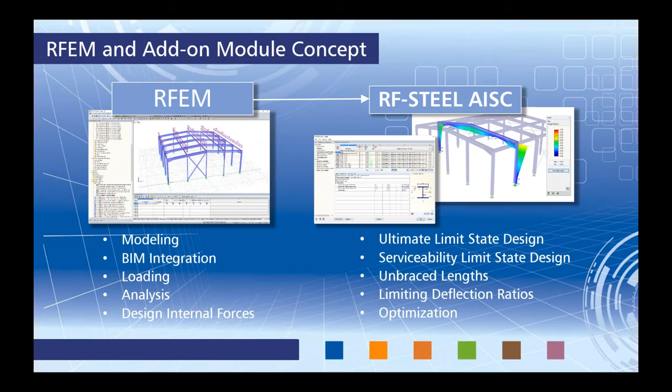In the 2010 edition of the AISC, in Chapter C, like I mentioned, we'll be focusing today on the direct analysis method. This is in comparison to the effective length method in Appendix 7. Back in the 2005 edition, these were actually flip-flopped. The effective length method was in Chapter C and direct analysis method was in Appendix 7. To me, this kind of tells you that maybe this is the direction that a lot of engineers are headed, more so towards a direct analysis method rather than effective length. We do have the option to do both in the program, so I will show you today focusing on the direct analysis method.

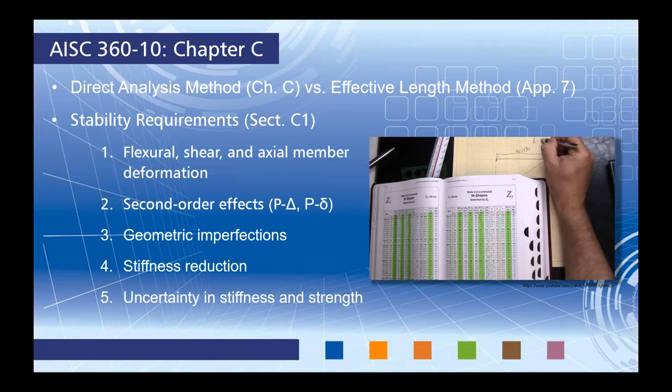Section C1 gives us 5 stability requirements. Those 5 requirements include number 1 here, flexural, shear, and axial member deformations. Well, this is in RFEM alone with the analysis. We also need to include second order effects, P-delta and P-little-delta, which we'll discuss in our next slide. We want to take into account geometric imperfections. We want to take a look at stiffness reduction and how that's handled in the program, as well as uncertainty in stiffness and strength. So with that, we can jump into our RFEM model.

So those of you who are not familiar with the program, this is RFEM. This is the main program where, for the purpose of saving a little bit of time here, I went ahead and modeled a 3D steel hall.

We have our tables that we can work with down here at the bottom. We have our project navigator, which you'll see me in quite a bit today, as well as our tools up at the top. As far as our structure goes, as you can see, it's just basically our steel members from the AISC. We have some columns here that are typical W shapes.

These are moment frames looking in the global X direction. I have some smaller columns here that are HSS members. I have these purlins filling in between our moment beams, HSS members as well. And lastly, I have some lateral bracing here that are single angle members.

I also used our load combination generator to basically produce the ASCE 7 load combinations, which we'll take a look at in just a minute, but you can see them all populated here. As far as the applied loads, I did use our load generator, area loads on members, to create a dead load at our roof height here.

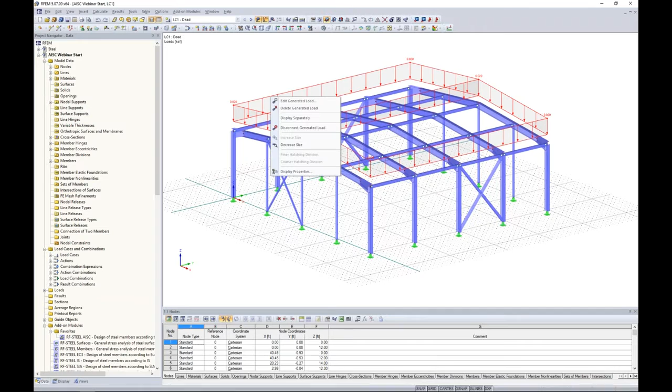Now you can see that I can always right-click and display separately, and I did so that it is a one-way load distribution on our purlin members only. Same thing goes for the live load, just maybe a little bit smaller of a magnitude here. Now I can always just click the display separately again to view them more so as an area load.

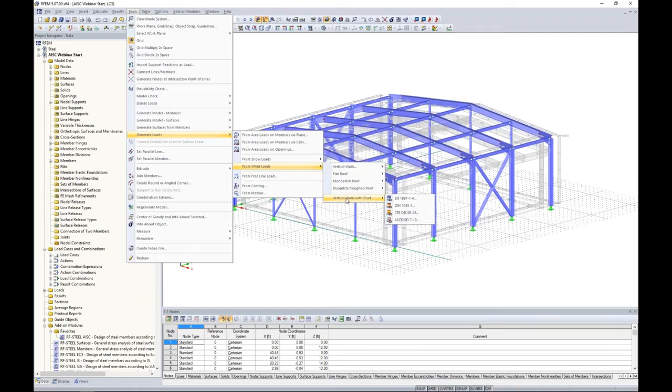And lastly, I used our load generator for our wind loads. This is available under Tools, Generate Loads. We have both snow loads and wind loads here, and we can take into account both the walls and the roof according to ASCE 7. Now, this is for pretty general type structures, as you can see from this picture here.

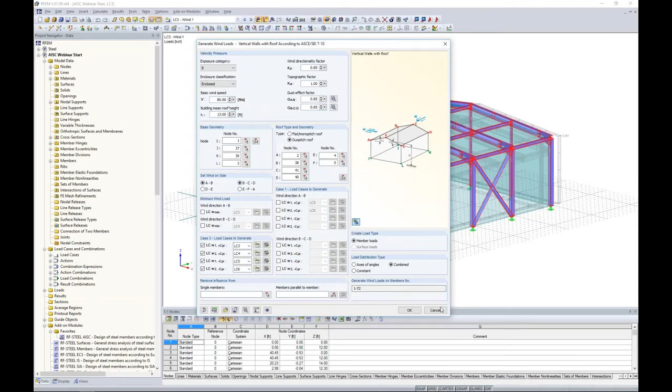The minute that you're kind of getting outside of these rectangular shapes for building type purposes is when you'll need to manually apply those loads in RFEM. For this particular case, I only did apply case 3 from ASCE 7. We can also apply case 1 and minimum wind loads as well. Just to keep things a little bit more simple, I've only applied case 3 though, so just keep that in mind. With case 3, we then have 4 wind load cases that are generated automatically, which you can see here.

So with that, I can jump into my load cases and combinations. And just like you saw graphically, here is our dead load, our live load, and our 4 wind load cases. I can take a look at my combination expressions, and because I use automatic wind load generation from ASCE 7, I have my LRFD load equations and my ASD load equations that were created automatically. If I press this little info button here, I can see exactly what ASD load combinations the program is going to address, as well as the LRFD.

So under the load combinations tab, this is where our individual load combinations are listed out. You can see here that the orange are categorized according to our LRFD equations, and then we have the red for our ASD equations.

What is nice though is that under my load cases, I've only defined dead load, live load, and wind load. You can see under action categories, we have rain, we have snow, we have earthquake, but the program filters out all those unnecessary load cases so that we're only looking at the relevant loads. So that's nice, we're not having to filter through all those other load cases in order to apply those to our structures. Our result combinations here are nothing more than an envelope solution for our LRFD and our ASD load combinations.

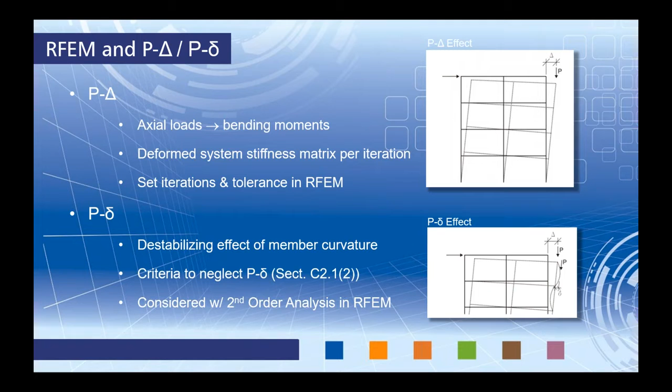Now this really is the engineer's discretion, but the nice thing about RFEM is that with that second order analysis, we will always include P little delta. Some other programs require you to add additional nodes along the member to take that into account, but with our program, you don't need to do all of that. It's automatically considered when we're running that second order analysis. So jumping back to the program, you can see here second order analysis, and it's very clear that we're running both P delta and P little delta.

If I go into Calculate and Calculation Parameters, this is where we can control our iteration and our tolerance settings for P delta and basically any nonlinear analysis within the program. The default set for max number of iterations is 100. That's a fairly good number. Now, when we are talking about precision and tolerance, we give you a range if you check this box from 0.01 to 100. This isn't necessarily a percentage.

There's so much that goes into this nonlinear analysis that we give you this range from 0.01 to 100 with the lower end of this factor being more exact. When we're getting up towards the 100 range, this is going to be much less exact. So the program will iterate until we're reaching somewhere along this range that we have set. And you can see that the default is set at 1.0.

The problem being the lower factor we go here to get a more exact answer, the longer the solve time. And if you set this too high, then you might not have accurate results. So again, default is set at 1.0. Typically, you're not going to touch this. So that's why we have this grayed out as it is.

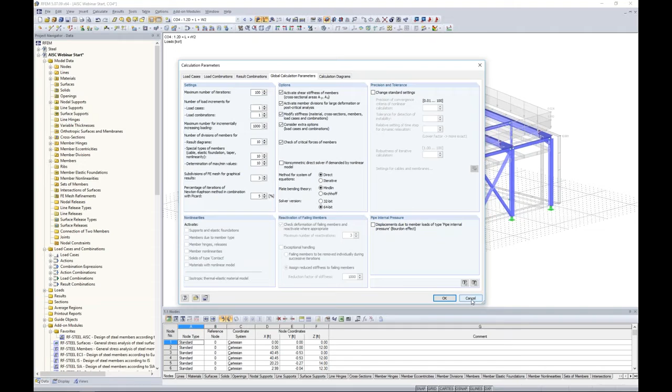Like I said, you can go ahead and adjust these factors, but most likely, unless you really know what you're doing, you probably will not be in this precision and tolerance section here. So that essentially covers P delta and the second order analysis within the program. Jumping back to the PowerPoint, the third item from Chapter C is geometric imperfections. And I want to discuss a little bit about how RFEM can handle this.

The consideration of initial imperfections comes from section C2.2. The code tells us that this is more so to address column out of plumbness. When we're looking at member out of straightness, this is more so addressed in Chapter E for our compression members. So addressing column out of plumbness, we have a couple options for this. We can either directly model the imperfection. This comes from section C2.2a.

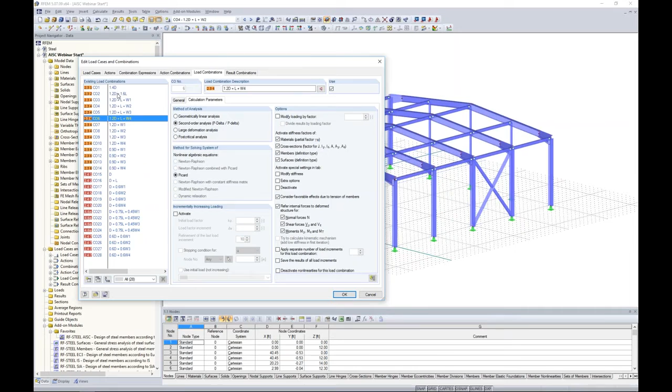Now I can tell you that 1.7 is a pretty high ratio. I think that for most structures, I won't say all because this is certainly something that you would want to check for yourself, you will not come very close to that 1.7 ratio. For example, this structure, I ran it and I think I was at 1.4 or 1.13 or something like that. So therefore, that tells me that I don't need to apply my notional loads to any of these load combinations that have wind load in them. But you'll notice that my first two load combinations for dead load and live load, well, these are gravity-only loads. So therefore, technically, I do need to apply these imperfections to those particular load combinations.

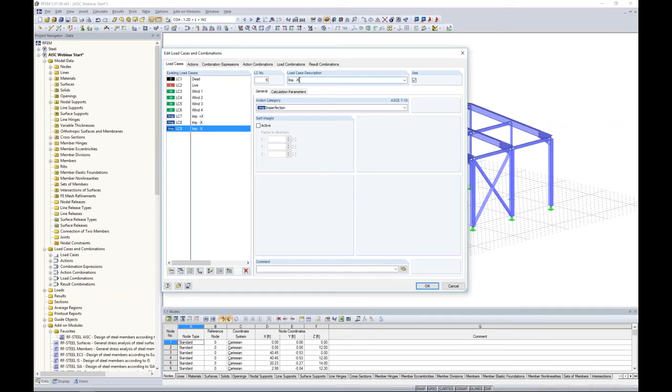So how do we do that? Well, back under load cases, I'm going to create a new load case. And under the action category, we have this option imperfection down at the bottom. I can give this load case a description, so we will call this imperfection positive X. I'm going to create a copy of this and rename it to negative X. Create another copy as positive Y. And one more copy as negative Y. Now, as I just showed you in the PowerPoint, the code does require two orthogonal directions as well as positive and negative. So that's what we're addressing here with our 4 different imperfection cases.

So now that we have applied these different imperfections to the load cases, we need to somehow implement them into our load combinations. If I look at my load combinations, I still don't see any type of imperfection here. So how can I apply these to my load combinations? Well, under combination expressions for LRFD, there's an option for imperfection load cases here. If I check this checkbox, then automatically this settings dialog box pops up.

And here are my 4 imperfections that I just created. Now I'm going to uncheck a couple of these options. Now what I do want to have checked is I want all imperfection load cases as alternative, meaning I don't want them to act at the same time. I want to treat each one individually, not as additive.

This other option, subject to specific load cases, well, this is where I'm going to tell the program to automatically insert these into the load combinations, but never to include them with my lateral loads. So how do I do that? Well, there's a button here with 3 dots, and that brings up select load cases. Now I can select my lateral loads here for wind load. So notice the only ones I'm leaving unchecked are my gravity loads, dead load and live load. I click OK. So now this imperfection positive X will be excluded with any load combinations that contain those wind loads.

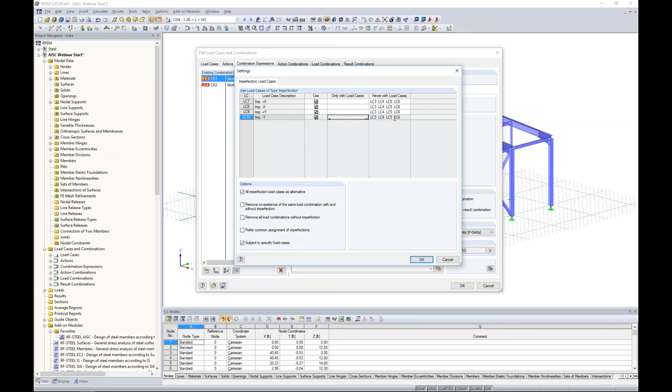So now that I've given it some criteria on how to apply it to my load combinations, I also want to check this checkbox here, differently for each combination expression. And the reason for this is I don't want to apply these imperfections to my ASD load combinations. My ASD load combinations I'm going to use for deflection only, so I really only want to use the imperfections for my design purposes for LRFD. So now you'll notice that because I've checked this differently, my imperfection load cases ASD is unchecked.

So now let's take a look at our load combinations. You'll notice we have the 1.4 dead, but now we have 4 additional load combinations, including imperfection 1, 2, 3, and 4, all treated separately. The same goes for 1.2 dead plus 1.6 live. And then we have the 4 additional imperfections. But the minute that we take into account that lateral wind load, I have no imperfections applied to these load combinations. This is exactly what I wanted. I wanted the program to filter out those imperfections and only apply to my gravity-only load combinations.

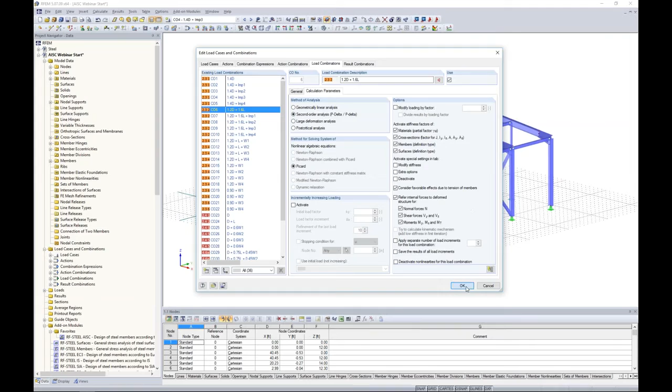If I scroll down here to my ASD load combinations, I don't have any imperfections applied to them at all. Again, this is exactly what I wanted. So you can imagine when you have a ton of load combinations, this is a very useful feature. The program has a lot of automatic features so you don't necessarily need to go in here and add them in manually. Now for each of these load combinations, we are still running them according to a second order P-delta analysis.

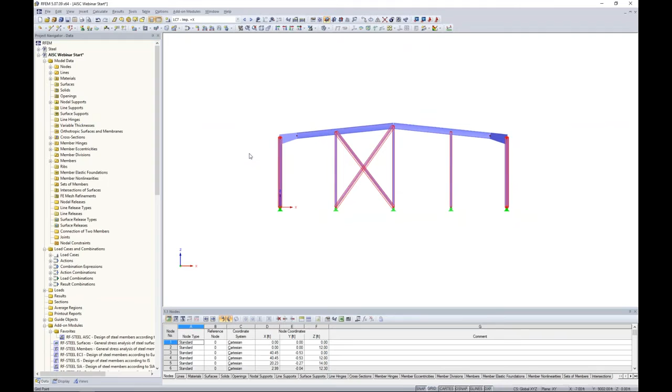So now that we have applied them to our load combinations, I want to select it from my drop-down box here, imperfection in the X direction. So I've applied them to my load combinations, but I haven't exactly applied them to my structure. So now we want to do so. As the code mentions, I only want to apply them to my columns; out of plumbness is really what we're looking at. So I'm going to highlight all of my column members, and if I hold down my control key, then I can unselect my braces here, just like what we would do in AutoCAD.

I can create a new user-defined view here, visibility by selected objects, and under my Views tab in my Project Navigator, at the click of a button here, I can create a new user-defined view. So this one, we can title it Columns. So now if I were to ever get out of this view by canceling my visibility mode, doing other things, and I want to go back to my columns, well, now that's available right here. And you can create as many user-defined views as you would like.

So for our imperfection in the positive X direction, I want to make sure that this is what's available in this drop-down box here. Under Insert, Loads, Imperfection, I'm going to choose Graphically. And you'll see that my list of members that I just highlighted are available in this list here. And this should look pretty familiar because in this drop-down, I've selected AISC 360-2010, current loading. Well, this is the equation for notional loads. We even give you the code reference according to C2.2b.

Here's my 0.002 factor. We do allow you to modify that if you choose to do so. We have our alpha factor according to LRFD or ASD. And then our Yi. Yi is going to be those gravity loads, our dead load and live load, applied in our structure.

So again, the notional loads really depend on the loads being applied to the structure. We also have the option down here for precamber. So if you did want to put in some type of precamber for the structure that's also dependent on your axial loads, then you could do so. For our case, we're going to leave this as 0 and only apply this so-called out of plumbness.

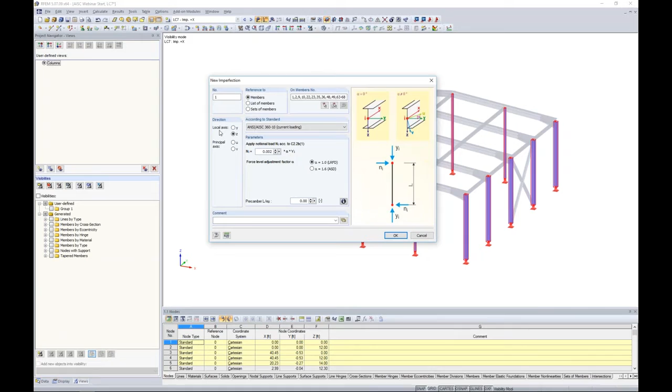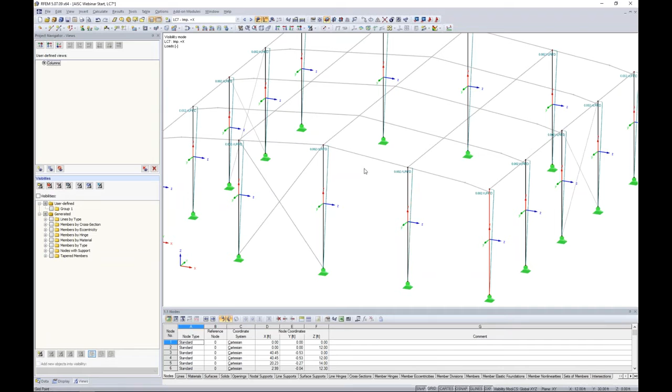Now, we will want to apply in the local axis direction, local Z. So I'm going to click OK, and something that may be helpful is if I right-click and turn on my local axes and my members. I'm going to also turn this into the wireframe view. Now we can scroll in here. Here's my imperfection. It's telling me 0.002 LRFD. This is that out of plumbness that we're going to take into account for those gravity-only load combinations.

I'm going to scroll over to negative X. I need to highlight my members again, and again go to Insert, Loads, Imperfections graphically. And instead of a positive 0.002, to account for the negative direction, all we need to do is put in a negative 0.002 factor here, and we have our imperfections in the negative global X direction.

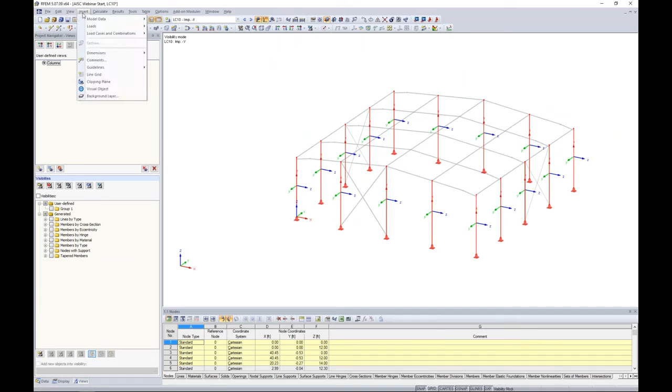I'm going to do so again with the positive Y direction, Insert, Loads, Imperfections graphically. This time I'm going to leave it as a negative factor here, 0.002, in the local Y direction. So when I click OK, you'll notice that I've now applied them according to the global Y positive direction. Here's our second orthogonal direction taken into account. And lastly, we have our negative Y, Insert, Loads, Imperfections graphically, positive 0.002 in the local Y-axis direction.

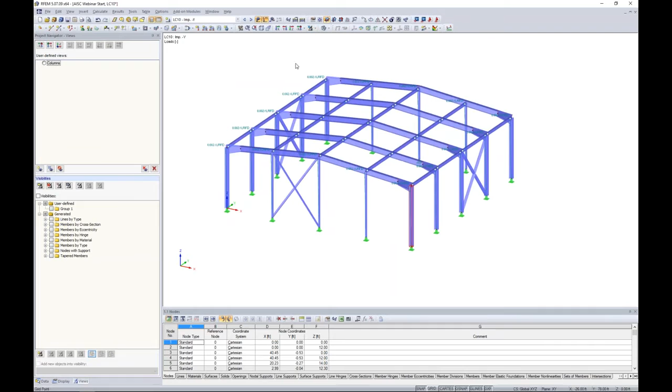So I can turn back off these members here. We can render our sections, turn off the local axis system, and I'm going to cancel this visibility mode, and let's just drop down to one of these load combinations where I've applied the imperfections. So now you can see my dead load, my live load with the appropriate load factors, as well as those imperfections that have been applied. Okay, so that is all that we need to do to account for those imperfections.

Let's go back to the PowerPoint again and discuss the modified stiffness and how we can address this in RFEM. Section C2.3.1. This tells us that we need to apply a 0.8 factor for all axial and flexural stiffnesses to members that contribute to the stability of the structure. Now there is a little note section in the code, and it tells us, well, in order to avoid artificial distortions, just go ahead and apply this 0.8 factor to everything. So this is a very easy way to avoid the artificial distortions. Apply that 0.8 factor to all axial and flexural stiffnesses of every single steel member within our structure.

Now there is an additional tau sub b factor for flexural stiffness. This comes from section C2.3.2. Again, this is just a screenshot directly from the code, and you'll notice that our tau sub b factor is dependent on our axial loads. So when our required axial compressive strength over the axial yield strength is less than 0.5, then tau sub b can just be equal to 1.0. But the minute that that ratio is greater than 0.5, well, we need to use this equation that's dependent on our axial loads to calculate what the tau sub b factor is, which will be less than 1.0. Again, we have our alpha factor 1.0 for LRFD and 1.6 for ASD.

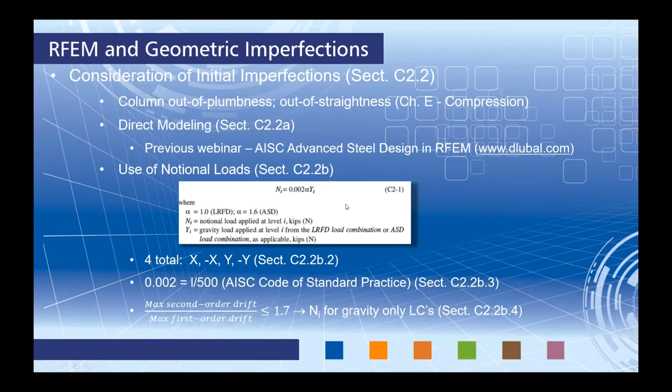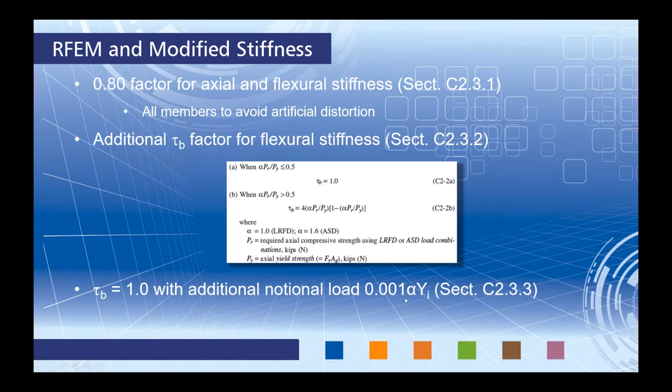And what we also can do, the code tells us, is that with a tau sub b equal to 1.0 for all of our flexural stiffnesses, we can completely forego this second equation here and apply an additional notional load of 0.001 alpha Yi. This is exactly like the notional loads that we saw in the slide before with our imperfections. Now, it is very clear that this notional load is not in lieu of our notional loads from our geometric imperfections, but it must also be applied to our different levels. So what's nice though is that in RFEM we can take this into account. So to me it's almost easier to have the program automate this tau sub b calculation than to go back in and add even more notional loads.

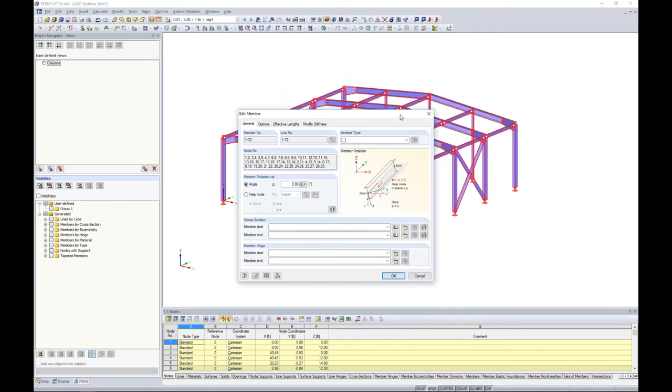So let's take a look back in the program to see how we can apply these stiffness reductions. What I want to do is I'm going to select my entire model. Everything is highlighted in red. And if I right-click on any one of the members, I'll see the member option here and edit. We have this modify stiffness tab, and this is the case for all members within the program. Now the default is set to none, but if I go ahead and open up this drop-down, I will see according to AISC 360, section C2.3.2.

So we even give you the code reference. Again, this should look very familiar. This is the criteria that we were just looking at directly from the code. Tau sub b factor, we can either set this to iterative. So in that case, it will determine the ratio of my required versus my limit axial compressive forces.

Or I can set this equal to 1.0 and then I can go back in and apply those additional notional loads. Again, I think it's almost easier just to let the program iterate and find that tau sub b factor for me. Now just know that this tau sub b factor will only be applied to our flexural stiffnesses, not axial stiffnesses.

We need to give the alpha factor a designation. In our case, we're designing per LRFD. Now here is our 0.8 multiplication factor for both our flexural and axial stiffnesses. It's 0.8. This is exactly what the code tells us to do. Notice you can't edit this, and the reason why is because this is what the code tells us to do. So if we're going to design according to the AISC 360, then we're going to only put in the application according to the code.

If you wanted to do so in some other way for whatever reason, we do have multiplication factors here where you can adjust your stiffnesses individually for the members based on whatever criteria you would like. For our case, we are going to use what the code tells us to do. So now I click OK, and that tau sub b factor and that 0.8 modification factor have automatically been applied to my structure. So after all of that, we are finally ready to run an analysis within RFEM.

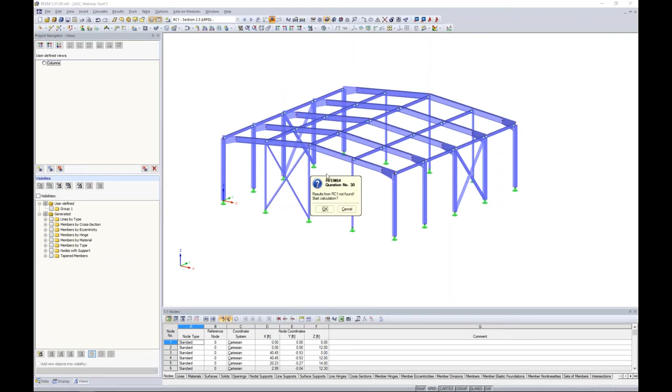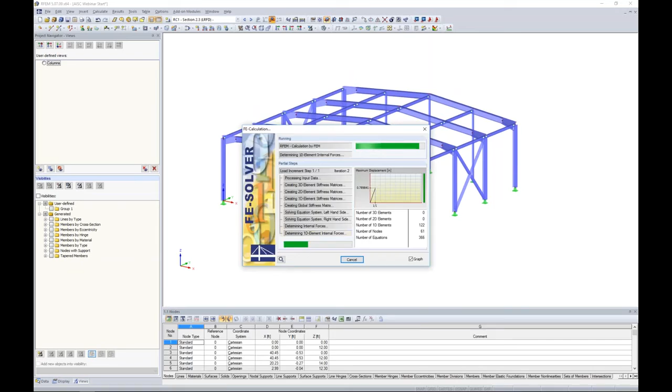If I select RC1 here, this is my envelope solution for LRFD, and I can begin my calculation. I wanted to make a very clear point that everything that we have done up until now has not even touched any of the add-on modules. So everything we've done for the analysis purposes, including stiffness reductions, imperfections, has all been done in RFEM, our main program. And now we're just running all of our LRFD load combinations to get the analysis results in the program.

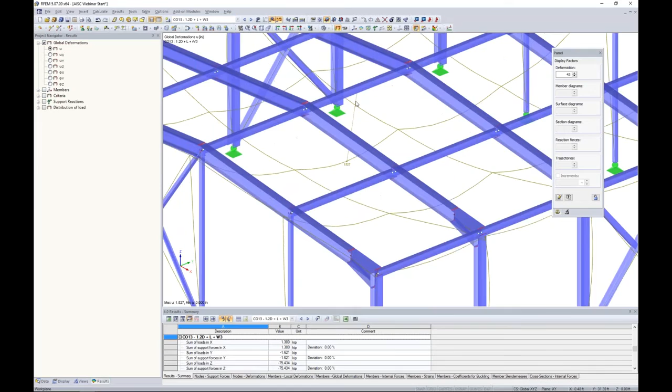Now, when I do run a result combination, you can see here that I have a couple different numbers shown here. That's because for a result combination, we give you both the max and the min values. You can change that here in our result combinations. Maybe better is to jump to a particular load combination 13, to view the deflections in particular. So after we ran our analysis, we have our results pop up here on the project navigator.

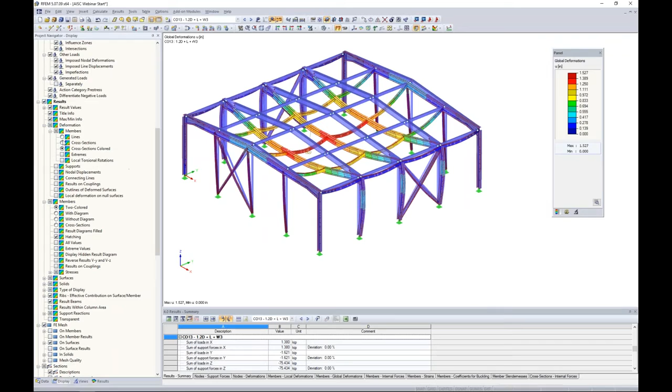Under the Display tab, I want to make it clear that this Display tab really controls everything that you're viewing within this graphics view. So if you're not happy with the basic line elements here for our deflection, first we go to Results and we can expand out this tree, go to Deformations, and under Members, we can change this according to how we'd like to view the deformed structure. We can choose cross-section colored here. We can move this back to lines, and this is the case for everything really that you're viewing here. RFEM gives you a lot of control over your results or your input or anything else that has to do with the graphic view.

So maybe back on our Results tab, we want to take a look at our members in particular. And so here we can select members, and I'm under Load Case 13 here. And I'm looking at, let's say, our internal forces for our axial loads. So you can see here that, again, this is just a basic view of our axial forces, but if I ever want to change this, I can go back to my display. Maybe I want to view it as a color diagram with some different contours.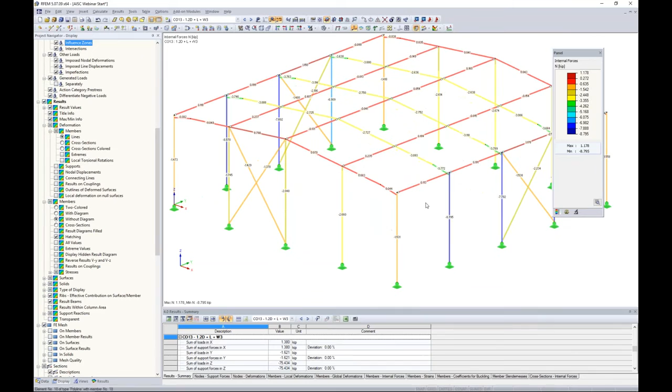I can view it without the diagram so that it's a basic wireframe structure, and I can view these different colors here based on the axial loads, or I can even view it as a rendered cross-section. You have complete control over what the scale is here. You can change colors if you would like. So if you can't read something very clearly, again, complete control to change any of that. You can always also right-click on a member and go to the results diagram, and here is going to be a little bit better of a display in more detail. We can take a look at our shear forces and maybe our bending moments along this particular member.

We can even drop down and choose a different load combination if we'd like. So this is a little bit more detailed view rather than viewing everything graphically. If we go back to our Results tab, maybe we're more so interested in our support reactions. Perhaps we'd like to just select one of these moment frames here. We can base it on the visibility of the selected objects.

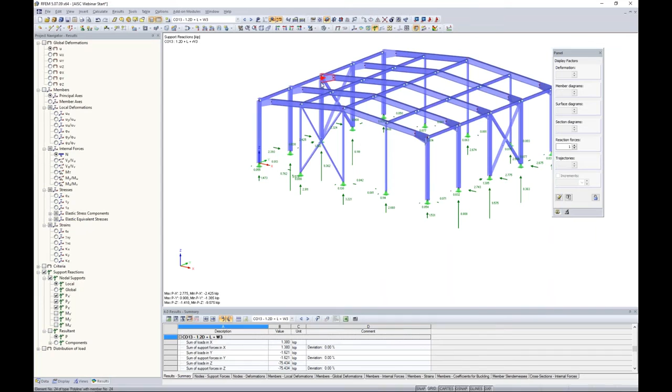I have the ability to print off this picture here. Again, I can increase font sizes, I can change colors, I can do anything that I'd like as far as viewing these results. So essentially, this sums up the basic first half of the webinar in regards to the analysis. Again, everything was done in RFEM so far, just to take a look at internal forces and how to apply the code standards for the direct analysis method.

So let us jump into our add-on module, STEEL AISC. The list of add-on modules are in our project navigator here, and you can see it's a very long list. We have a lot of different international standards. We have a lot of different materials. You can always right-click and add something to your favorites to move that up to the top of the list.

We also have the add-on modules drop-down box up in the file menu here, and it is categorized a little bit more clear into different materials such as steel, concrete, timber, aluminum, as well as some other modules. To me, I think it's most efficient to just use this list over here in our project navigator, and I can double-click on my STEEL AISC.

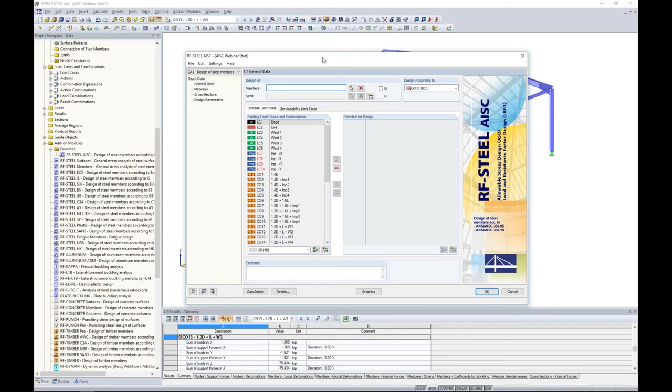A clear distinction here, we are now in the add-on module. And when I say add-on module, it's nothing more than a dialog box within RFEM. So we're not opening up a separate program here. We're just simply launching this dialog box, which is going to take all of my materials, my sections, my loading, my internal design forces into this add-on module.

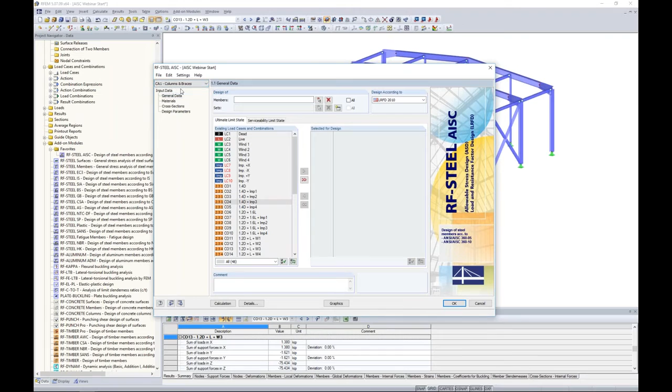The first thing that I want to do is to rename my case. So this case number 1 here, I'm going to call it columns and braces. So I'm going to design all of my vertical members to begin with. So now I can see right here, case number 1 is called columns and braces. I want to define the members that I would like to design. I'm just going to select all of my vertical members with my selection box.

I'm going to do design according to LRFD 2010. We also have the 2005 code available here. Now for my ultimate limit state, I'm going to choose all of my LRFD load combinations. So if I hold down my shift button, I can move those all over at once. Serviceability, this is the reason why we have our ASD load combinations to check our deflections.

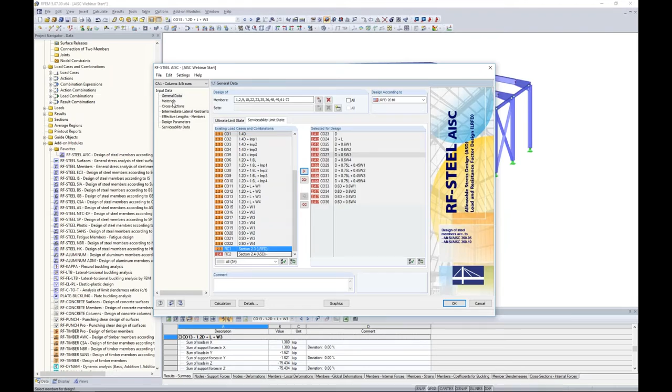Then all I need to do is just to simply move down the list. So I take a look at my materials. Well, again, these are brought from RFEM, so I don't need to modify these. I can if I want to, but I don't need to redefine them. So I have steel A992 and steel A36.

If I take a look at my cross sections, the only cross sections relevant here are the ones that I've chosen for design under this general data. This is the case for any of our input or our results tables, which I'll show you later as well. But as I click in the tables here, the program is automatically synced up in the background of RFEM to show me exactly where I'm at in the structure. So a small structure, maybe not so useful, but when I'm getting into larger structures, you can see how this can be extremely useful.

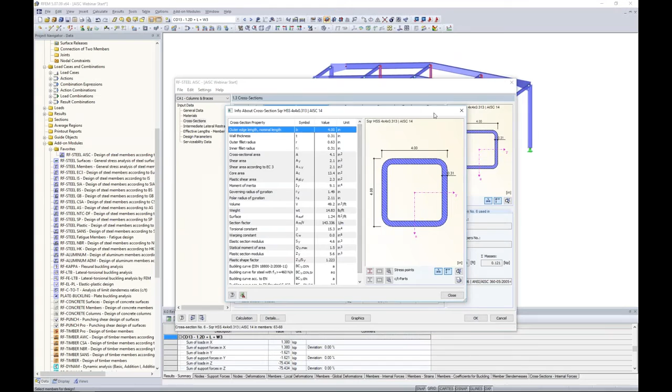I can take a look at my cross-section data by just the little info button here if I want to take a look at any of those particular cross-sectional properties. They're also available in my table down here. Intermediate lateral restraints. So this would be if my top or bottom flange is restrained at any point. I will show you this for our next case. I'm going to assume that for my vertical members here, I don't have any lateral restraint for my top or bottom flanges.

Effective lengths. This has to do with our effective length factors and our unbraced lengths. And I can't stress enough how important unbraced lengths are. As a software program, the program is only smart enough to know the unbraced lengths as you've entered them into the program. Meaning you can see right now our unbraced lengths; we have a few columns here, buckling about the strong axis, buckling about our weak axis, torsional buckling, and lateral torsional buckling. We have the column here for our K values and our K times our L.

Now this is our unbraced length times our K values. So to begin with, the program will always default to the full member length. And the reason for this is that we don't know connection types. We don't know if there's some type of, I don't know, wall here that is maybe bracing the structure for the weak axis. The only thing that it knows is what you've modeled it as.

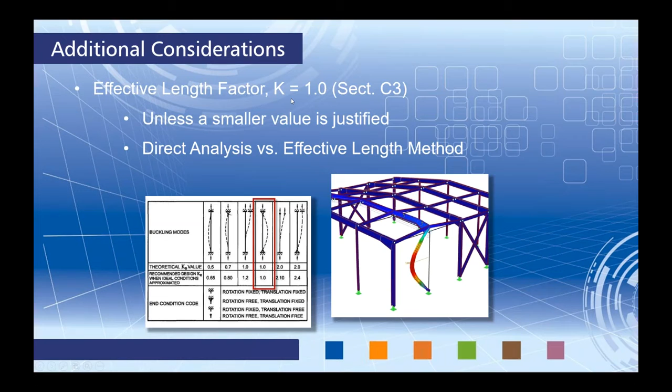Now this is a very huge difference between the direct analysis versus the effective length method. With the effective length method in Appendix 7, we have to figure out what our K factors are, whether that's the recommended value or the actual value. That's a big difference in the approach between the two different methods. With the direct analysis method, we take all of those uncertainties into account with our stiffness modifications. So this is one big advantage of using the direct analysis method is that I don't have to worry about my K factors anymore. I can just set them all equal to 1.0.

So back in the program, you can see that that is the default. So I don't need to touch any of my weak axis or my strong axis or my torsional buckling K factors. If I'm unsure what is strong and what's weak, I have a little graphics view here showing my z-axis, my y-axis. We also tell you in this table buckling about major axis, buckling about minor axis. For the case of these vertical members, I can leave the unbraced length, the full member length that's already default within the program. I'm assuming that it's not braced anywhere else.

So now all I need to do is to continue down my list, design parameters. Modification factor C sub B. The program defaults to 1.0. It's a more conservative approach. This comes from Chapter F for our flexural design. We can actually use this drop-down to change this to manually if I'd like to calculate this factor manually, or we can use the equation F1-1. This is where the program will take a look at all the moments across the beam and according to the equation F1-1 come up with the C sub B factor. This way we might be able to get a little bit more of the capacity.

Now I can manually change these according to each member here, but an even easier approach, for those who are not familiar with it, I can change all my members at once by checking the set input for members number. I have the all checked, but if I wanted to only do a certain amount of members... For this case I want the all checkbox checked. And then using this table in the lower section, I'm going to select according to F1-1 again, and now you'll notice that all my members were automatically changed to take that into account.

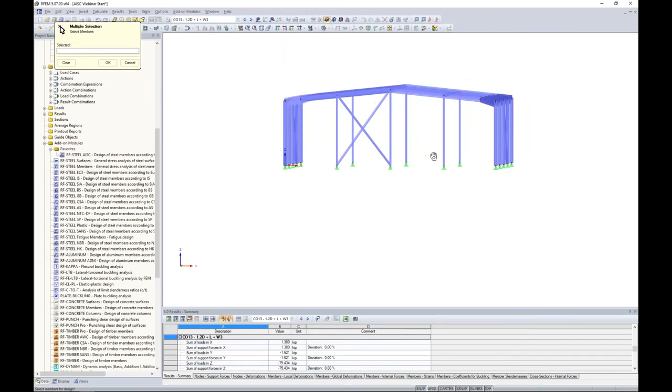So now I will select this drop-down box and choose member, and I want to choose my members to design my serviceability state for. I can either choose a single member, a couple members, or I can drag across this selection box and design for all of my vertical members at once. And now you'll notice that this table was automatically populated.

Now my reference length again is going to default to the full member length. That's fine in this case. My direction it's going to check for in both the strong and the weak axis direction. If I had a pre-camber that I'd want to take into account for my deflection, I could enter that in here. And lastly, the beam type. These are all simply supported beams, or they're supported on either side. We could also choose cantilever here if we had a cantilever member type.

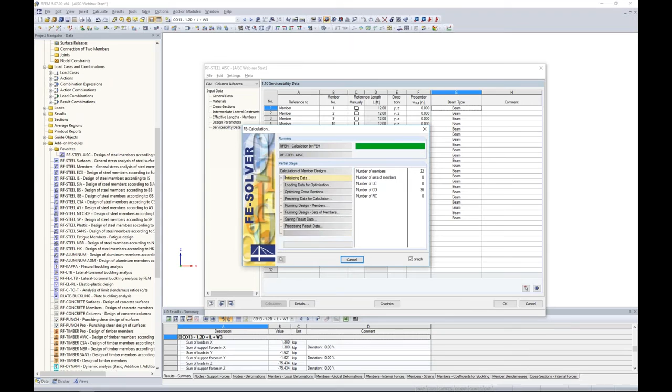And now we are finally ready to run a calculation. So this will take just a split second longer, and the reason why is because I haven't solved for my ASD load combinations in RFEM yet. My LRFD we already solved for, so that's bringing those into this add-on module. So we're running the ASD load combinations for our deflection checks, and you can see now that we have designed for all of our members.

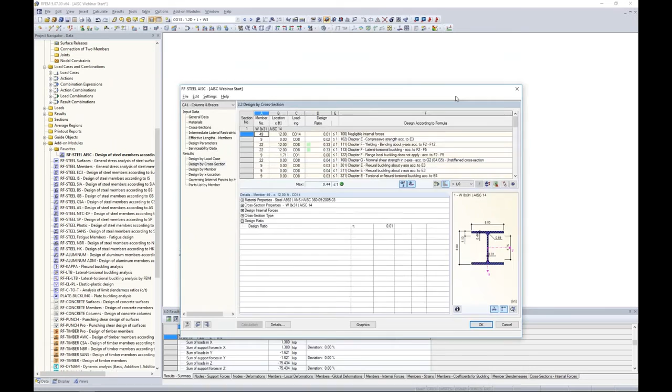We have this whole results section available after running the calculation. I can view my designs by load case, so you can see load combination 1, 2, 3, 4, etc. We can also view the design by cross-section. I'm going to exit out of this real quick, change my view, and go back into the add-on module, because if I'm looking at design by cross-section, as I'm in this table, the program will automatically sync up to where I'm looking at exactly. So again, this is nice to see exactly where you're at. For design by cross-section, we only designed 3 cross-sections, so we should only have 3 options available here, which we do.

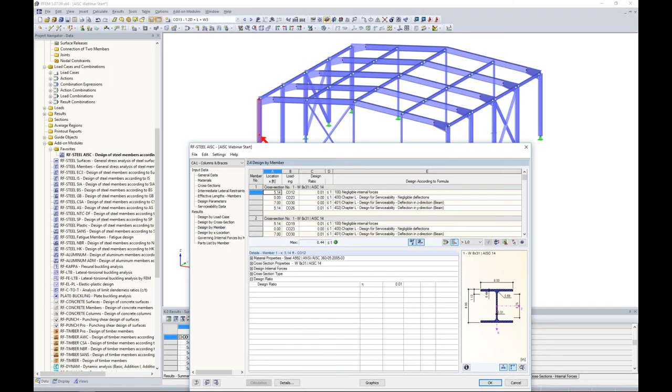Now, probably the most important one that we'll be referring to a lot is design by member. This is something that I always emphasize because I think it's such a strong feature of our program. If I take a look at one of my members here, let's say member number 9, first of all, I can see where it's at within the structure. And you'll notice that we give the code check for every single requirement within the AISC. We don't just give you the controlling case. This is so important because as engineers, we're always encouraged to do some hand calcs to make sure that our results make sense rather than just plugging numbers into a software.

So when you're doing hand calculations and you think, okay, I think a different case should be controlling, well, that's probably available here within the add-on module. And then for each calculation requirement check, we further give you all of the variables that went into consideration for that design ratio as well as code references. We are certainly not a black box program. We try and give the user as much information as we can with code references so that you can understand where your numbers come from.

Now you'll still notice that we do have the controlling code check here. We have our green smiley face because we are below 1.0. If I did want to filter these to the max controlling case for every single member, I can do so with this little filter button here. So if I didn't want to see every single check, I can filter these out to see which one's controlling for each individual member. If I'm interested in all of them, though, I change this back to greater than 1.0.

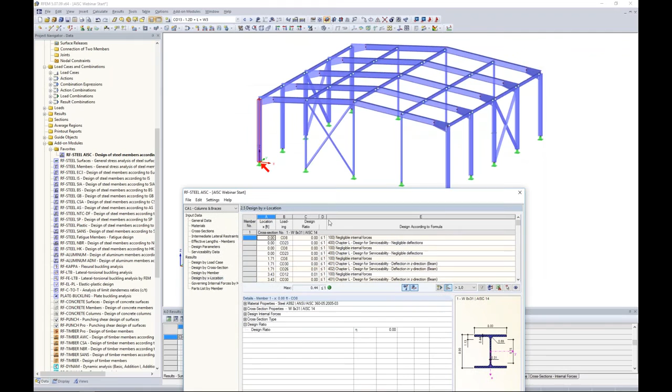Design by X location, this is going to be a little bit longer of a table. What this does is it gives us our code checks along the X length of the member for all the members that we have designed for. Again, useful if you're interested in every little detail about where the numbers are coming from. Governing internal forces by member, this is just what internal forces we're designing from, taken from RFEM. And finally, a parts list by member. This is nothing more than our material takeoff for our different sections. So that basically sums up the check for the first case for our members.

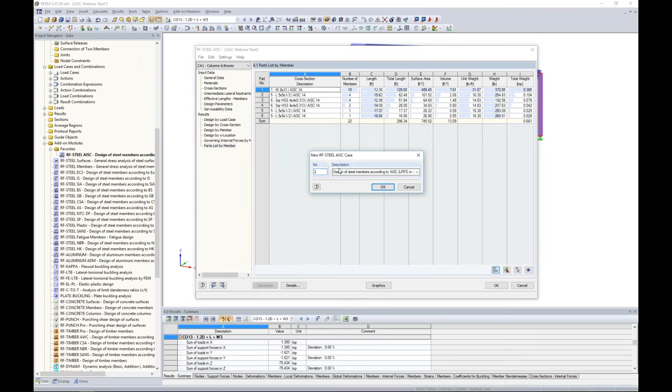So I'm going to run another case, and I just go to File, New Case, and this time we will select purlins. I click OK. It's asking me, do I want to save the changes? Yes, I do. And you'll notice that I have a blank slate again. I can always use this drop down and jump back to my columns and braces, so I don't have to input all that information again. I just want to design a different case here.

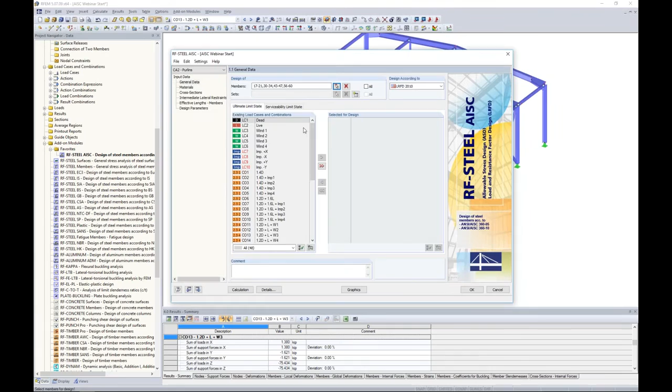So for my purlins, I want to use my selection box here. And again, we could create a user-defined view, but for now, I'm just going to hold down my control key to select all of my purlin members. I click OK. LRFD 2010, I'm going to choose my LRFD load combinations for my ultimate limit state design and my ASD load combinations for my serviceability.

Now again, we're just going to move down this list. Everything looks okay for our materials. Our cross sections, we're only designing our rectangular HSS members here. Intermediate lateral restraints. This is a case where maybe I have some type of metal deck on my roof, and I know that my top flange is going to be braced at the center point for all of these purlin members. Well, this is where we would define this within the intermediate lateral restraints.

So member number 17, you can see it highlighted here. Well, I can click that there is a lateral restraint available, and then I can give it the number of restraints along that member length. You'll notice that the program evenly spaces out those lateral restraints. I have this checkbox checked down here, relatively 0 to 1. This just means that it's going to give me the X location on a scale of 0 to 1, with 1 being the full member length and 0 being the beginning of the member. I can uncheck this if I'd rather see maybe a distance in feet.

So like I said, we're going to leave this as 1, assuming that it is braced at the midpoint here. Now again, I could individually put these in for each member, but rather I'm going to use the set input for member number all down here. I just need to redefine these by checking this checkbox here, and I have n equal to 1.

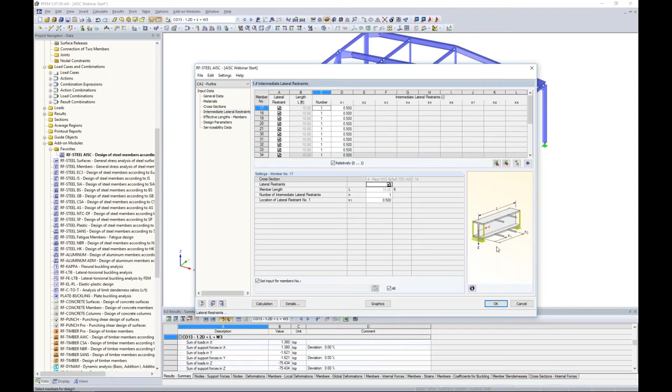Now at the current time, the program will brace both the top and bottom flanges. Available in our Eurocode add-on module, EC3, we have the criteria selection to choose either the top flange, the bottom flange, or both flanges. We know that this is important, and we will implement it into our AISC module in the near future. For right now, you just have to keep this into consideration that it is bracing both flanges. If you only had your top flange braced, then you would want to maybe take a look at which flange is in compression and choose the most conservative value here. So something just to keep in mind for this intermediate lateral restraints.

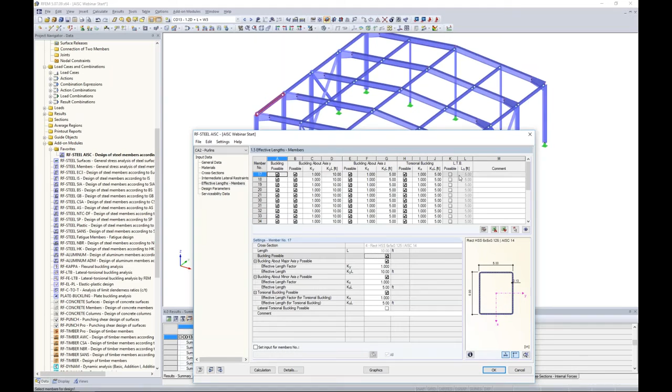Now, if we move on to effective lengths for members, you'll notice that our table should look a little bit different here. For our buckling about the local y-axis, our strong axis, we still have the full member length, 10 feet. That's great. I don't have anything restricting that strong axis bending here. Now, buckling about my weak axis, my local z, you'll notice that my k times L is now set at 5 feet. That's the halfway point. Same for torsional buckling. Lateral torsional buckling is not applicable for these HSS members, so that's why it's grayed out. So the program took this information from the intermediate lateral restraints and applied it to our effective lengths for our members here. So we can simply continue moving on down the list.

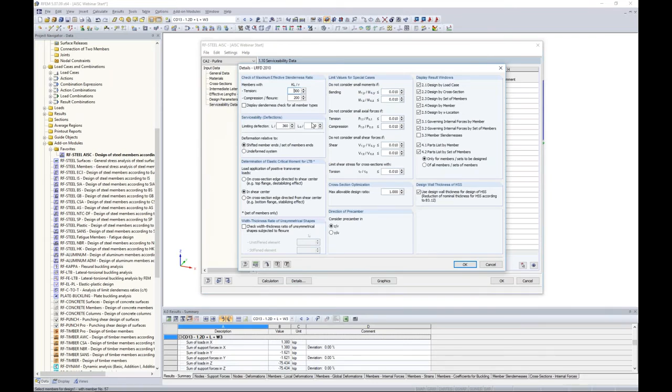Our design parameters, again, I'm going to maybe try and get a little bit more capacity out of this by choosing the according to F1-1 equation. Serviceability data, again, I can choose my members here, and I can simply choose all of my purlins by my selection boxes here. Oops. There we go. And you can see the program automatically populates this table. We're using the full member length. We're leaving these details as they are with L over 360, and I can run my calculation.

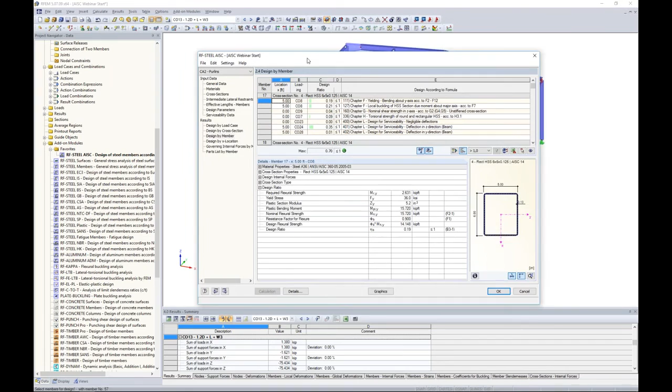Exact same results that we saw before, but obviously with different member design. But we still have the same layout by load case, by cross-section, by member. We have a controlling ratio of 0.70, which is pretty good for design. So as far as that goes, nothing really too different than our last case.

But for our third and final case, I want to show you the difference between sets of members and members within the program. So if I highlight these top members for my moment frame and I right-click, I choose under member, well, I can create a set of members here.

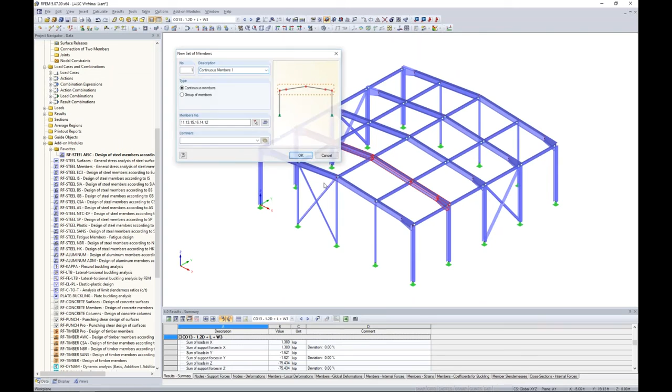Now, I can name this. Right now, it's just named default continuous members, and all of these members are considered for this one continuous member. Now, when I scroll in, I should have a very faint dotted line around all 6 of these members because this is considered a set of members.

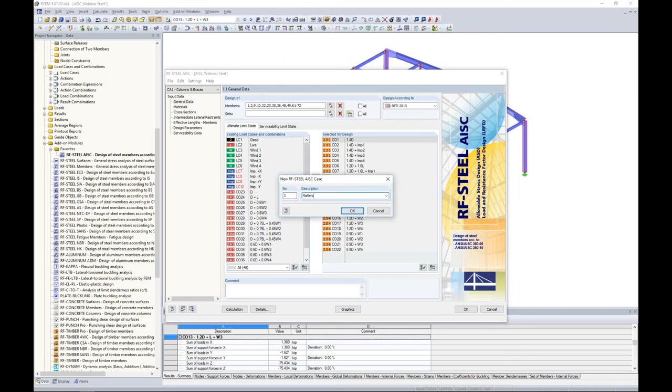So what I'm going to do back in the AISC design module is I'm going to create a new case here. And with this new case, we will call it rafters. I want to simply show you the difference between designing a member versus a set of members. So what I'm going to do is I'm going to select these 6 members adjacent to my set of members. Click OK, and I'm also going to select my set of members for design. You'll notice that one click selects all 6 of these because I've defined it as one continuous member.

And we're going to see how to do the exact same design for these 6 members versus the set of members, but how our input is a little bit different. So ultimate limit state design, again, nothing different here. We're just selecting our LRFD load combination, serviceability, with our ASD load combinations. Now, you'll notice that we have a few more options here under our list of input. You can see that I have sets of members for effective lengths in addition to members now. I also have nodal supports, member hinges.

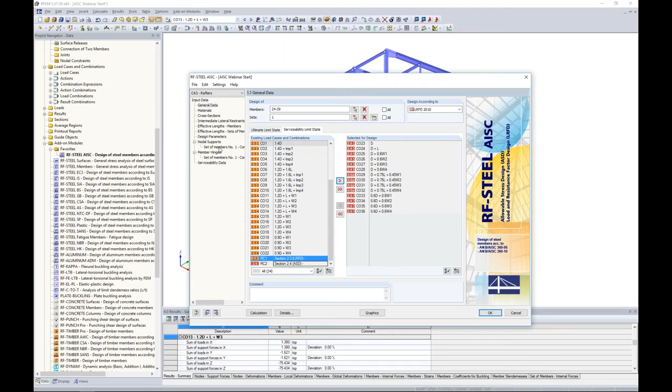So moving on down the list, let's just see how we can apply these. So materials, we don't need to touch. Cross sections, we don't need to address this either. This parametric section is simply my tapered section that I've defined near the haunches of this moment frame. Intermediate lateral restraints, I'm going to leave this all empty here. I'm not going to address any of that. Now, my effective lengths for my members. So members is separated from sets of members here, so I'm only dealing with these 6 separate members.

You'll notice that this is a case once again where I really need to focus on these unbraced lengths. If I take a look at my little tapered member here, it's telling me that my unbraced length for my strong axis is only 3.02 feet. This is really wrong. My strong axis bending is actually the entire length of this continuous member here, because I have nothing underneath it preventing it from bending in the strong axis. So actually what I want to set this as is 40.7 feet. You'll notice that when I do this, this K column automatically changes to 13.489.

At some point in the future, we will implement two separate columns here, one for K, one for L, and then a third that includes the KY times L. For now, just completely neglect that this K value is changing. That's just because our column here that's actually used for the calculations is what's important. Since our K is equal to 1.0 according to the direct analysis method, I'm just multiplying that by the unbraced length of 40.7.

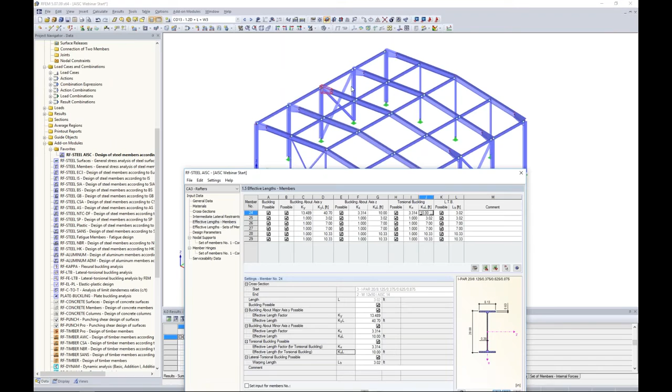Now, the same goes for my weak axis. It's certainly not 3.02 feet, but it's actually this length from here to here where my purlins are framing in to brace the weak axis buckling. So something more like 10 feet. Same thing for torsional buckling. You'll notice that we implement this feature that you can type it in if you'd like, or you can measure it graphically. Lateral torsional buckling, same thing. We want to measure this again to get a value of 10 feet. This is the case for all of these 6 members across here. You know, it's a pretty symmetric structure.

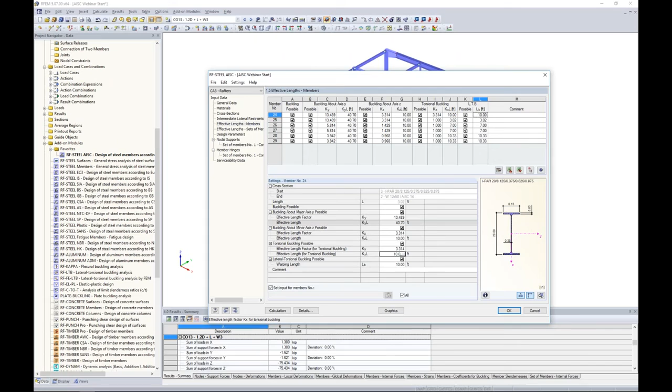So what I want to do is I want to set the input members for all. And again, for my KY times L, I'm going to retype this in so that the program will automatically populate this all. Now again, these K values were automatically affected by my input here, but disregard that; this is the important column for our calculations. Now the KZ times L, we have that set at 10 feet. We'll put that in again. 10 feet for my torsional buckling and lateral torsional buckling. So now these are the correct unbraced lengths for all 6 members. Again, this is why it's important that we have to individually look at all of these.

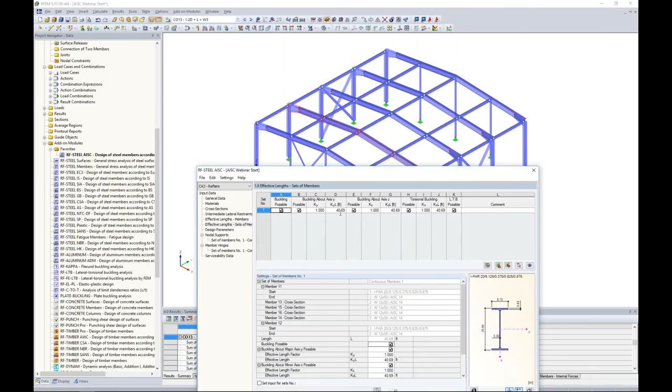If we jump down to my effective lengths for my sets of members, I only have one input. I just have my continuous member here. Well, these are not correct. Sure, my buckling about my strong axis certainly is 40.69. That's the full length of the member. But my Z-axis is not. So I could manually put this in, but rather I'm going to jump right down to nodal supports. So with these sets of members, the program will actually do an eigenvalue analysis.

And the reason that it does this is because these continuous members don't necessarily need to be in a straight line. So the advantage of an eigenvalue analysis is that the program will calculate the critical buckling moment in the results for us. That's something that a single member design does not do.

And we can also enter in the type of supports of these purlins framing in here. So you'll notice that the program automatically put at the 2 ends a fork type support. Well, I can also put these in where these purlins are framing in, this fork type support. And also take note that I am not putting this fork support where the tapered member transitions into my W shape. I don't have anything bracing it here.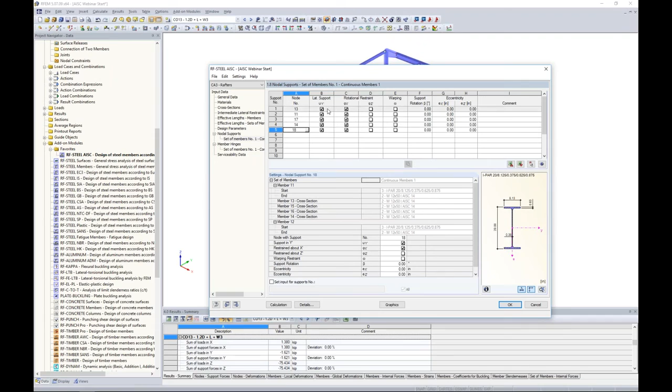Something interesting to note here with the eigenvalue analysis, it will then create a so-called kind of model in the background, an FEA model with 7 degrees of freedom at all of these locations. And something that's not available in RFEM or when we're designing our members individually is warping. If I click inside this box, I can actually click on the little details button down here at the bottom to open up my warping spring.

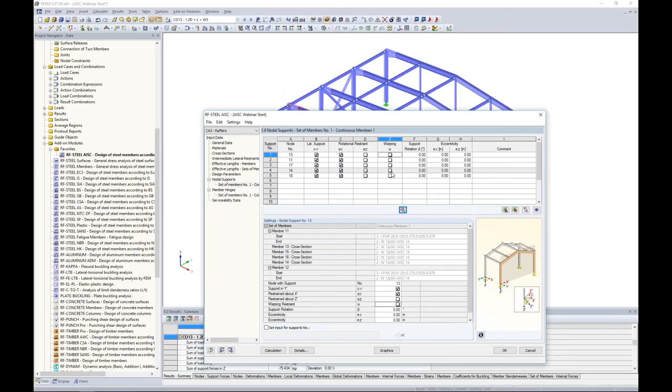So I can take into account warping stiffening depending on an end plate, a channel, an angle, and so forth. I give it the dimensions, and then the program will automatically calculate this warping spring for me. Again, this is a huge advantage because this is something that's not taken into account within RFEM. For our case, we don't have anything restraining warping, so we'll leave these just as simple fork supports at these locations. Member hinges, if we had some type of shear release, moment release, warping release, we could also put these in along this continuous member.

Now if I jump back up to my effective lengths for sets of members, you'll notice that these are now grayed out. That's because I put in those nodal supports, so the program will now calculate the most conservative value for my weak axis unbraced length as well as my torsional buckling and lateral torsional buckling. So a very effective way to design sets of members. Design parameters, again, I'm going to use this according to F1-1 by setting my input for all and choosing that from my option down here in the table.

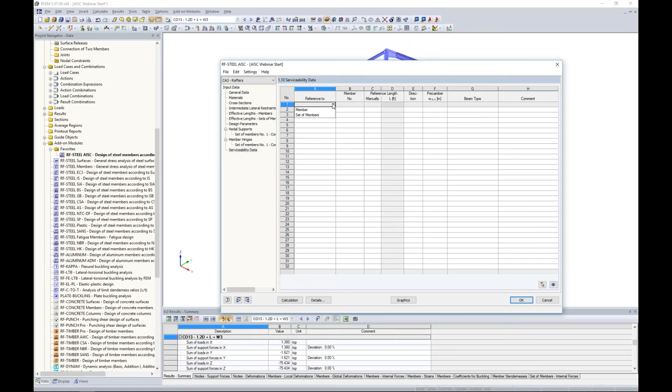And lastly, serviceability data. We certainly want to compare how the serviceability checks for both of them match up. So the first thing I'm going to choose is my sets of members. I only have one set of members to choose in this table. I click OK. The reference length is the full member length. That's fine. Now I also want to check my individual members adjacent to it to see if we get about the same results. I click OK.

All of those members are populated here, but this time I want to manually enter in my lengths here. I'm going to put in the full member lengths, 40.69. I hit my down arrow key and the F8. F8 will automatically populate those.

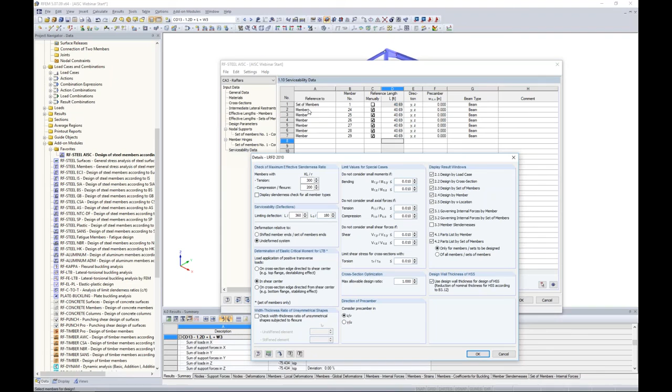The last thing that I need to do is to go into my details, and I need to change this to my undeformed system. The reason why is I need to compare apples to apples here. I can't compare to the shifted member ends because I'm taking a look at deflection of these individual members versus one continuous long 40.69 foot member. So I'm going to change this to undeformed system. I click OK, I click calculation, and now the design is done.

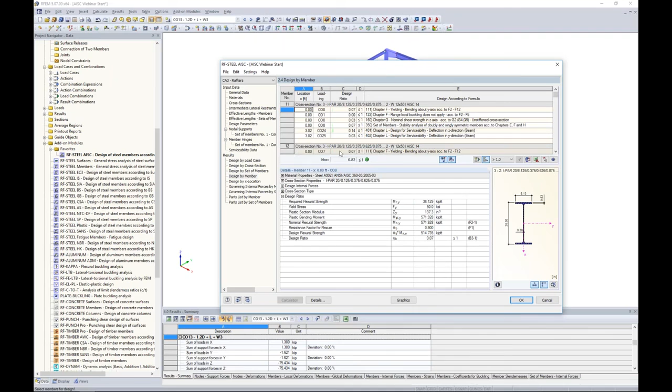Again, just like our input, we have a few other options here. We have design by sets of members. We also have design by member. So probably the easiest way to compare how these two values are matching up, our individual members versus our sets of members, is just to jump into our graphics view. You'll notice that for our graphics view, we're still in the results, but right now I'm in the STEEL AISC module. You can also tell that with this drop-down button here.

I can easily jump back to one of the load combinations to see my analysis results in RFEM, but as long as I'm under the STEEL AISC, that means that I am still within the add-on module. The results available are much more simplified. I don't have this long list of options because I'm only viewing the code checks.

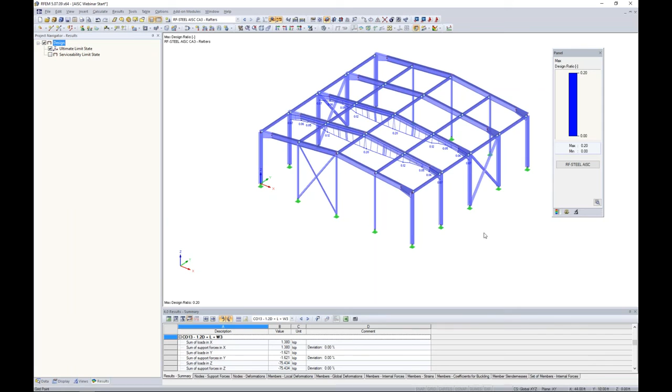So if I take a look, let me go ahead and highlight just these two that we were designing to make it a little bit more clear. And I take a look at my ultimate limit state design, 0.2, 0.2, that's great. I should see exactly the same results. I take a look at my deflection checks, 0.82, 0.81. Very, very close.

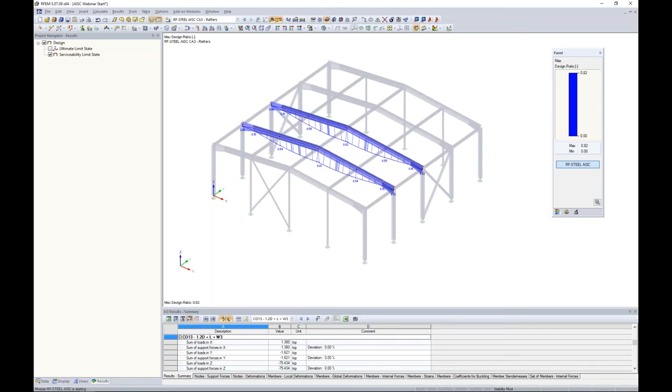Remember, this is an asymmetric structure because of our lateral bracing here. So I'd say that this is pretty good results. So I just simply wanted to show you guys how you could easily design a set of members versus individually designing the members. Both have their advantages, but certainly set of members maybe gives you a little bit more options in terms of warping. Now, the last and final thing to do is to quickly show you how to optimize.

Well, for this, I'm going to jump back to columns and braces. So these are my vertical members that I'm designing. Let me click OK and cancel my visibility mode here. I'm going to turn off my results. Going back into my STEEL AISC. Under columns and braces and cross sections, we have a column here called optimize.

So we get asked all the time the question, well, do you do optimization? Well, yes, we do. If we use this column in the drop-down box, I can either optimize from the current row, which means it will optimize from all W shapes within the AISC module. Now, if I wanted to limit that down, I could use a favorites list. So what is a favorites list?

Well, a favorites list can be done either here in the module with these three dots, or when I'm creating my structure, I can also utilize a favorites list. A favorites list down here at the bottom, I could create a new favorites list, title it 8 by something. If I wanted to optimize only my 8 by something W shapes, I can go ahead and uncheck all of these members here and only select my W 8 bys so that I can optimize within these particular sections.

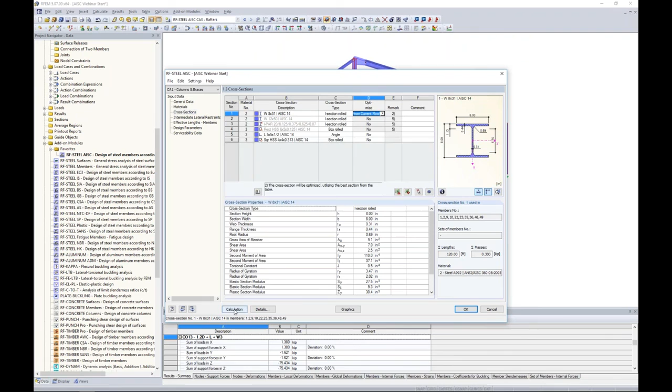For this particular case, we will optimize from the current row, so I want the program to pick whatever is most beneficial in terms of weight for the cross-section. Now, I click calculate, and you'll notice that it takes a split second. The program comes up with 0.97. Something to note about optimization, that this is just an approximation. If I go back to my cross sections, you'll see that the program optimized my previous 8 by 31 into a W 6 by 16.

What the program's doing, it's still taking the internal forces based on my old section to do that approximate member design of 0.97. If I go back to my cross sections, it's bright blue. The program gives me a warning. The cross section in RFEM is different from the cross section in RF-STEEL AISC. This is important. This isn't my final answer, this 0.97. This is not the final results.

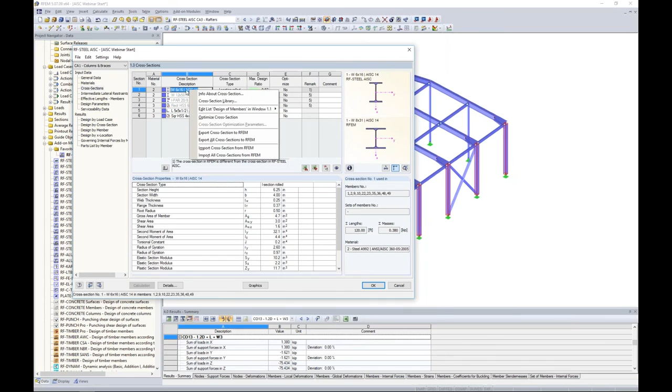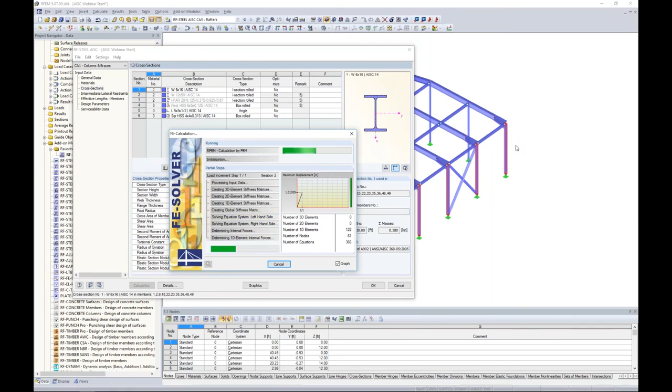So what I need to do is right click on this blue cell, export cross sections to RFEM. It's asking me to clear my results, and I need to rerun the calculation. The reason for this is that the program has now exported these W6x16s into my overall structure. It's rerunning all of my LRFD, my ASD load combinations with that new shape. It's going to take those internal forces back into RFEM to give me my accurate code check. So chances are we're going to see something other than 0.97. The 0.97 was just an approximation.

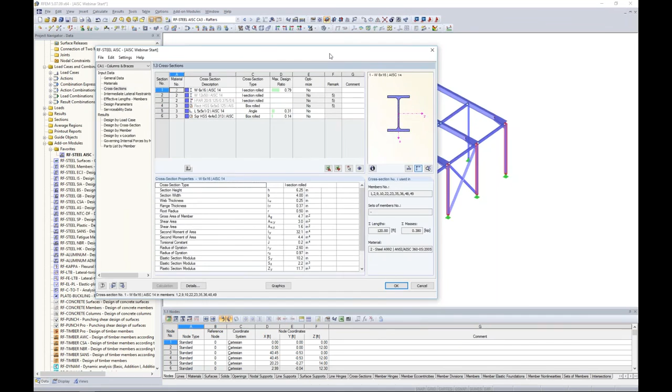So when we rerun this, we can take a look. It certainly is different. We now have a check of 0.79. This is further from 1, so we even have the ability to go into cross sections and optimize again if we'd like to, an iterative process until we find what we would like to use in the structure. So that's a short and simple way of how to optimize within the program. That essentially wraps up the webinar for today.